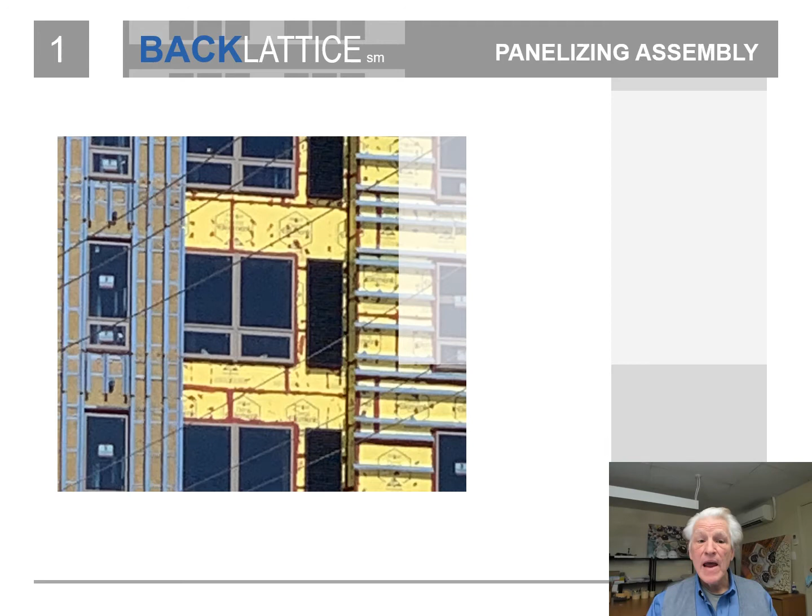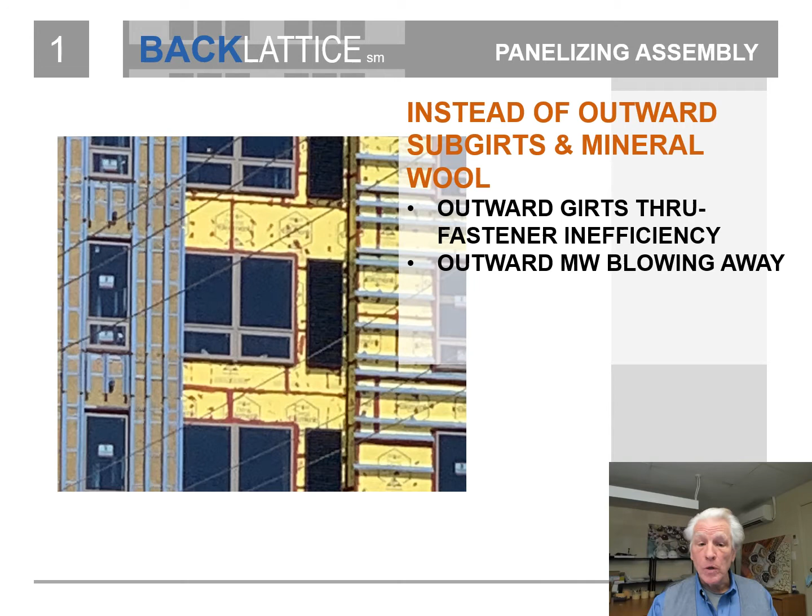Instead of the sub-girt framing being outward of the sheathing, which results in thermal inefficiency at every through fastener. Instead of trying to outwit the weather so that the outward mineral wool does not blow away in a windstorm.

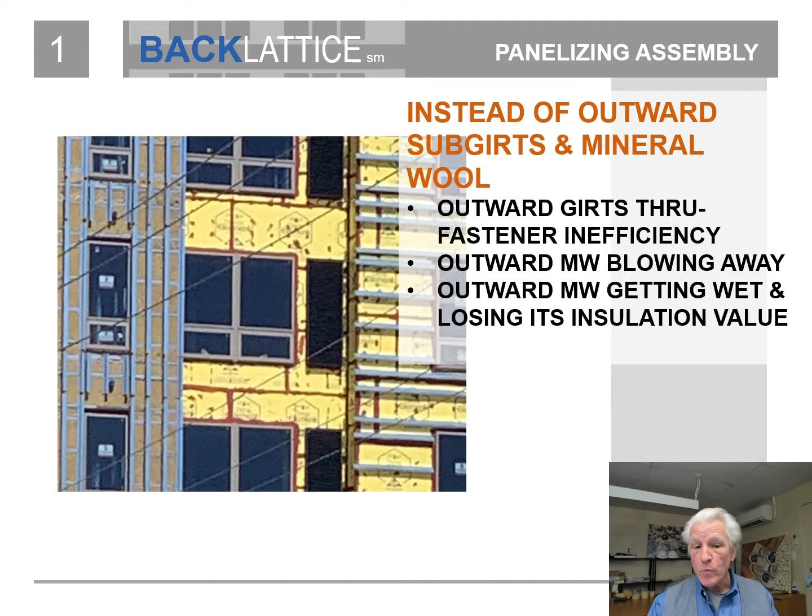Instead of having outward insulation, which produces the conditions for summertime condensation, which then wets the insulation, which then loses its insulation value while wet. Instead of the air barrier delaminating or blowing away before the cladding is installed.

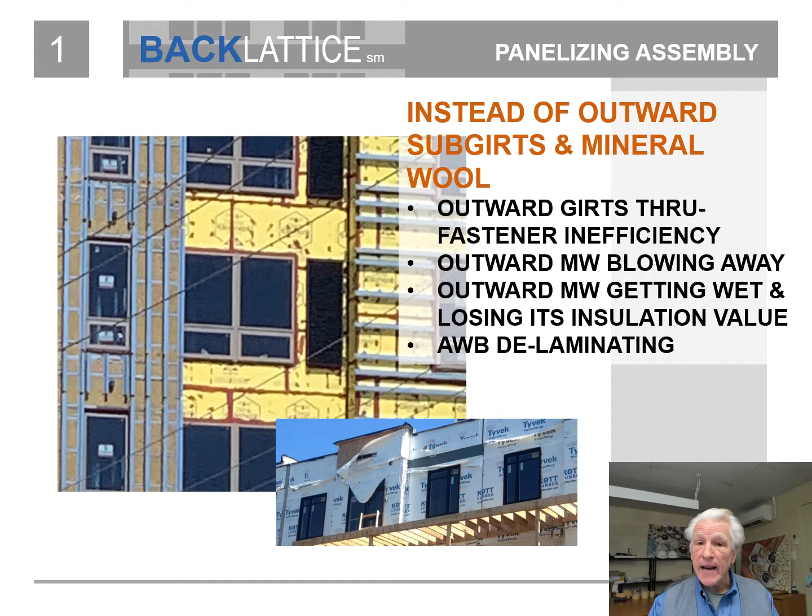Back-lattice is a better wall assembly. With back-lattice, the sub-girts and the cavity and continuous insulations are prefabricated and inward of the sheathing. This results in no through fasteners, only incremental, for high performance energy efficiency. No outward mineral wool or sub-girts.

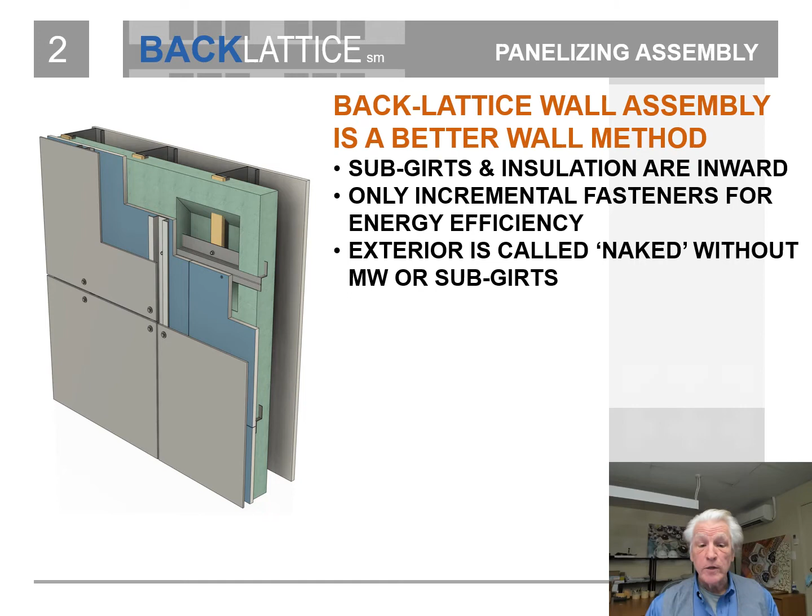With back-lattice, the exterior is referred to as naked. There is nothing outward of the protected sheathing. It is simply a naked wall that is ready for the final panel joint flashing and the finished cladding.

No problem condensation. Back-lattice has thermal modeling and WUFI modeling from Miami up into Canada, proving its multi-season performance. No winter condensation, and yes, summer condensation, but only where it belongs and can be safely managed.

No mechanically fastened sheet membranes, and no short-term delamination. Back-lattice only uses fully bonded, vapor-permeable air and weather barriers with a 12-month exposure. This allows for open-jointed rain screen and plenty of time for the construction schedule and for cooperative weather.

With back-lattice, our goal is faster, cheaper, better.

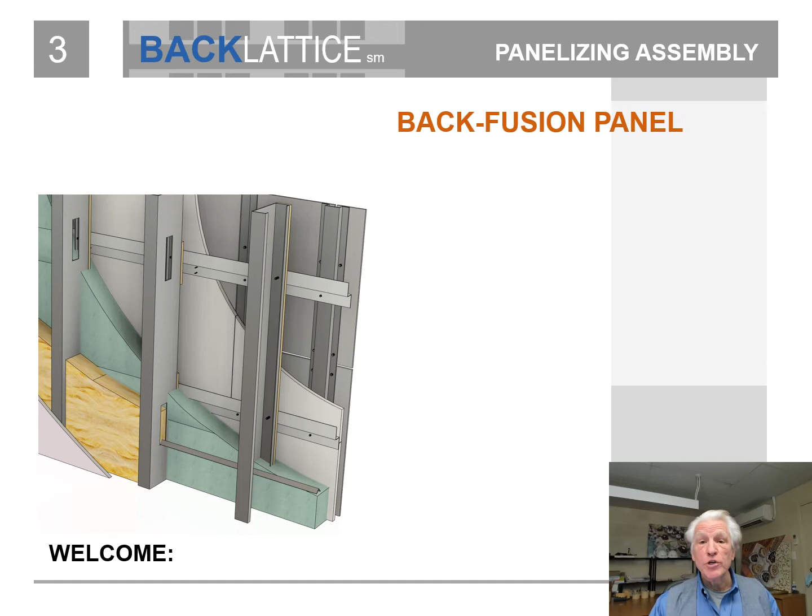Hello, and welcome to a short presentation which focuses on the back-fusion portion of the back-lattice exterior wall assembly. This is David Schoenhardt, the president of Back-Lattice Wall Systems.

My over 40 years as an architect and building enclosure specialist has led me to inventing and developing this back-lattice innovative and high-performance wall assembly.

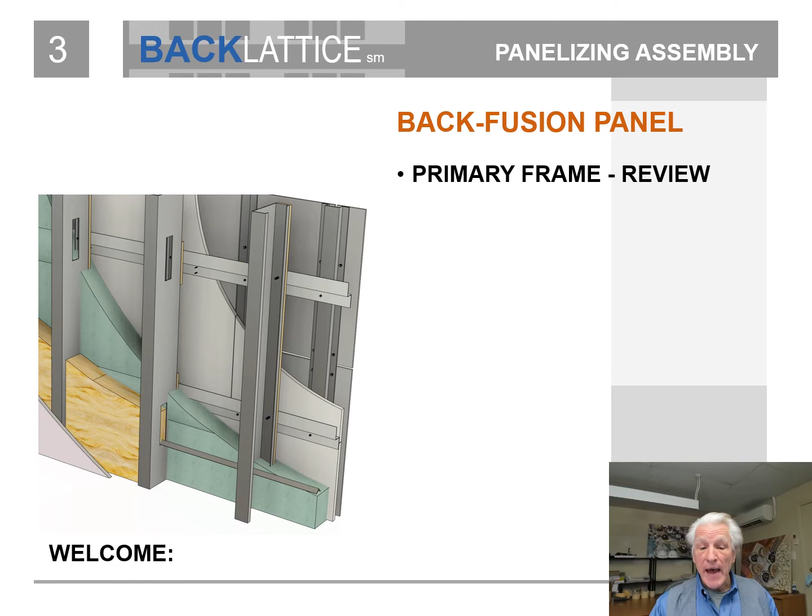In this presentation, we will start by reviewing the panelized stud and sub-girt framing along with the thermal isolation pads that were discussed in detail during our last presentation.

Next, we will describe the exterior glass mat gypsum sheathing for both non-rated and fire-rated assemblies. Then, the air and weather resistant and vapor permeable exterior barrier protection of the sheathing.

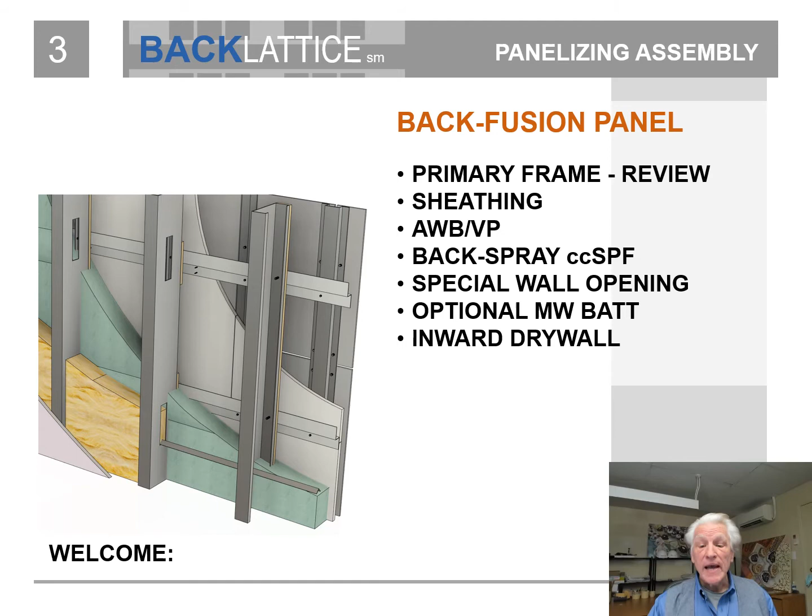Next, the optional between-stud mineral wool batt insulation, which is used to either super insulate the wall or to protect the wall for a 2-hour fire-rated assembly. Then finally, we will discuss the interior gypsum drywall when in a non-rated and in a fire-rated assembly.

As a review of the last presentation, the back-lattice wall assembly method of prefabricating the primary frame consists of the stud frame along with the sub-girt frame.

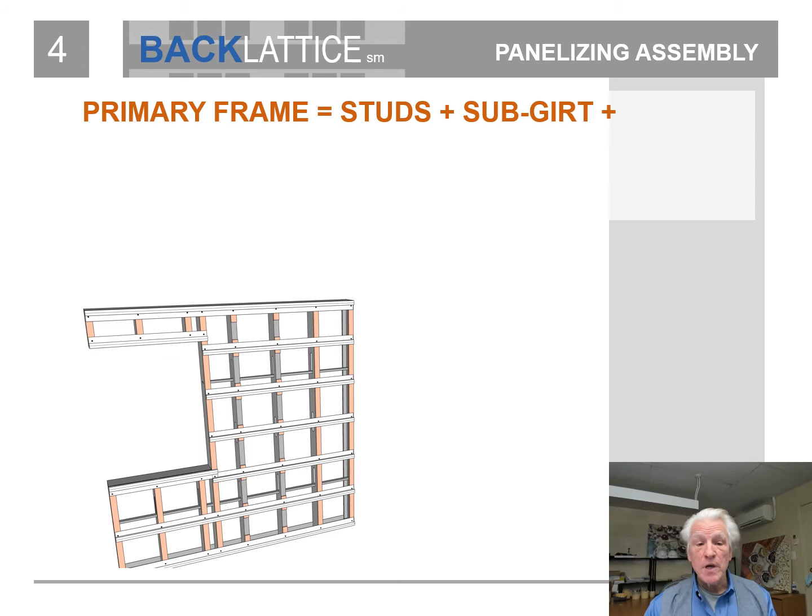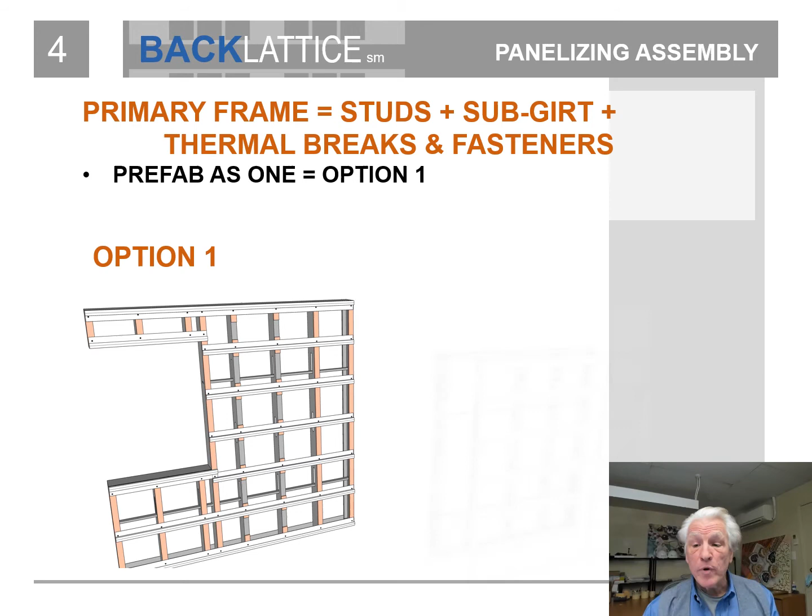These two frames are separated by thermal isolation pads and fastened with a single number 12 at each intersection. The two frames may be fabricated together as one assembly, or they may be fabricated as two pre-framed assemblies that are then joined together.

The primary frame, made up of the stud and sub-girt frames, is located inward of the exterior sheathing.

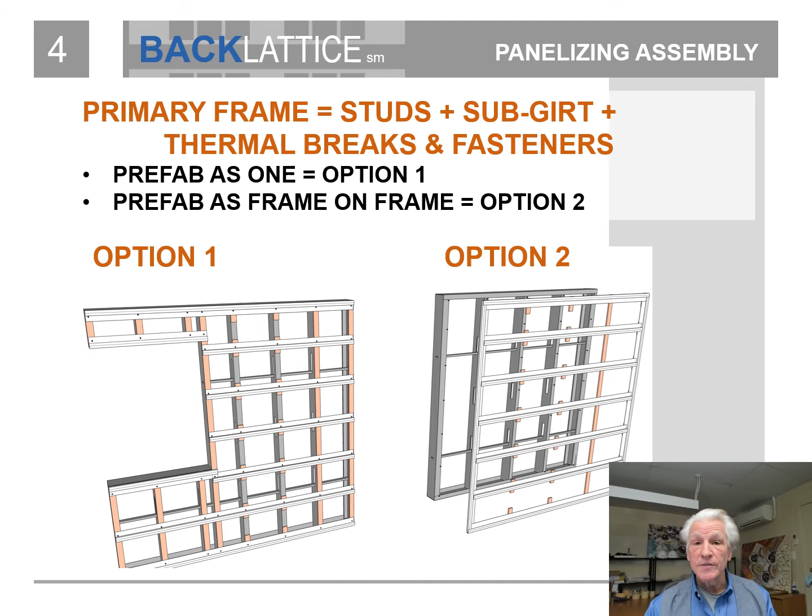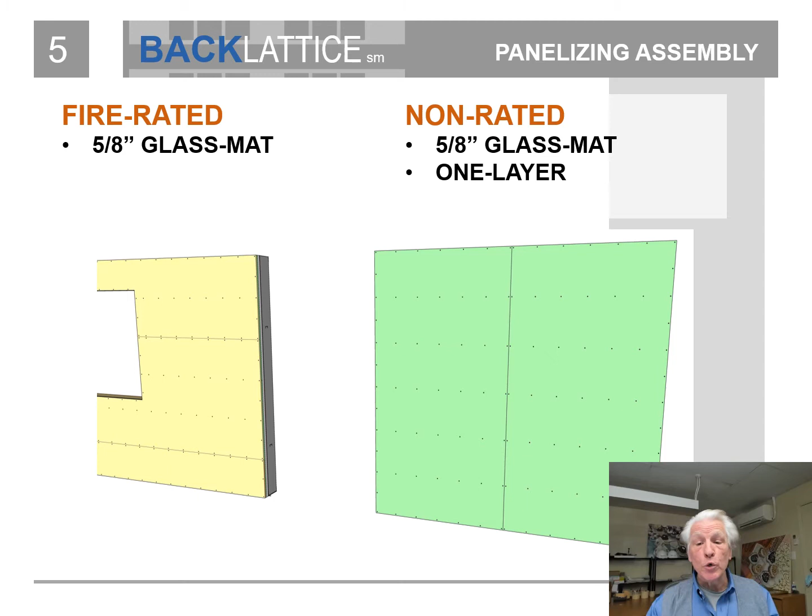The prefabricated back-lattice panel includes the exterior glass mat gypsum sheathing. Typically, one layer of 5/8 inch Type X sheathing is utilized, while if fire rated, 2 layers are required toward the side of the fire exposure.

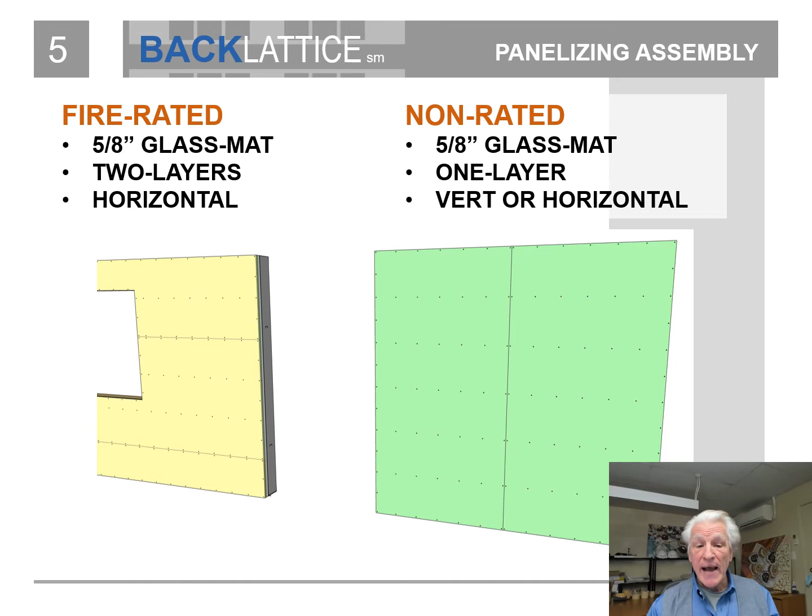The sheathing may be applied vertically or horizontally, but if fire rated, it is then applied only horizontally. This is because back-lattice wants every panel joint to be backed up and supported by the horizontal back-furring.

The back-lattice branded back-furring provides a generous 1 3/4 inch wide leg, which readily accommodates the two sheathing panels, each with a 1/2 inch fastener to edge setback, and it also allows for some construction tolerance.

Back-lattice thinks through and tests the little details.

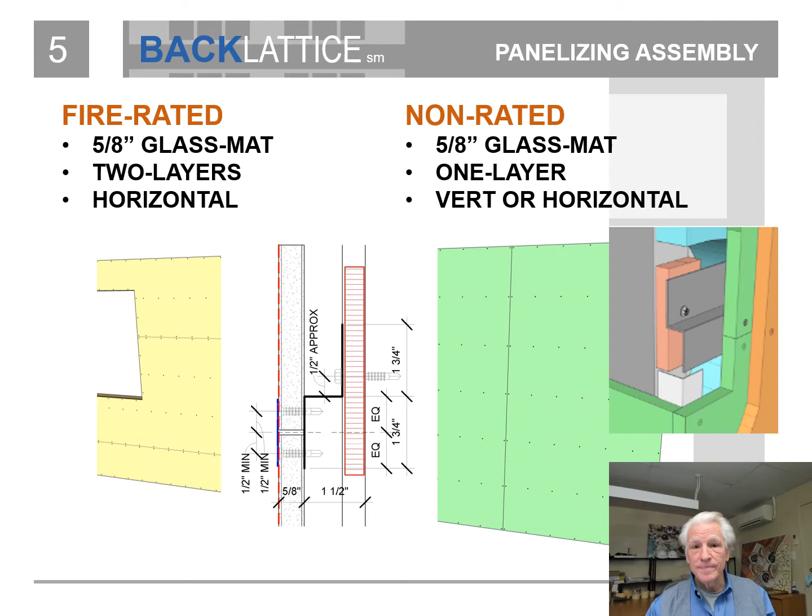The sheathing panels buffet the positive and negative wind loading pressures. Thus, their bracing and fastening is critical to understand.

The back-furring, which braces the sheathing, is spaced by the wind pressure limitations of the sheathing, in addition to the dead load of the cladding system, and the pull-out strength of the single number 12 fastener at each 18 gauge back-furring to 18 gauge stud intersection.

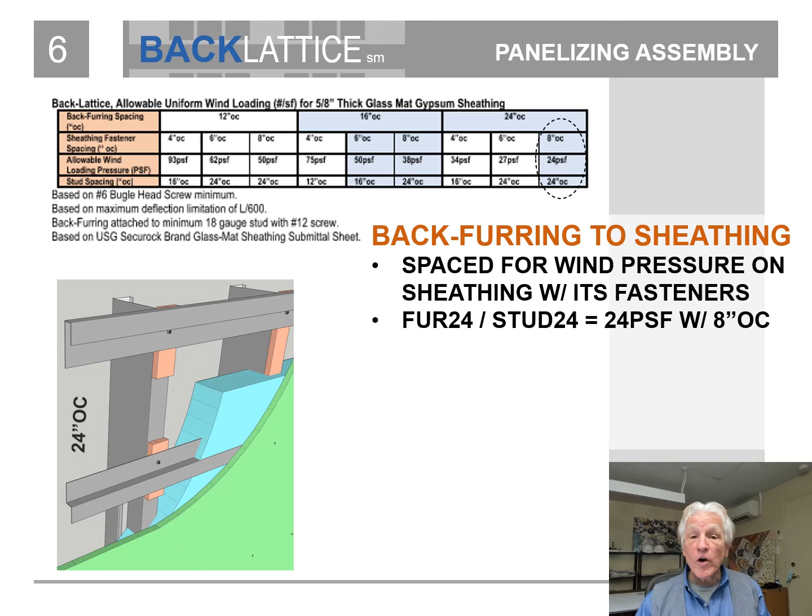With the furring at 16 inches on center and the studs still at 24 inches on center, then the wind loading is 38 psf. At the corners of the building with even greater wind pressure, when the furring is at 16 inches on center, and the studs are also at 16 inches on center...

While the sheathing fasteners are at 6 inches on center, then the allowable wind loading is 50 psf.

While the sheathing chart references number 6 fasteners, back-lattice only utilizes number 8 sheathing fasteners.

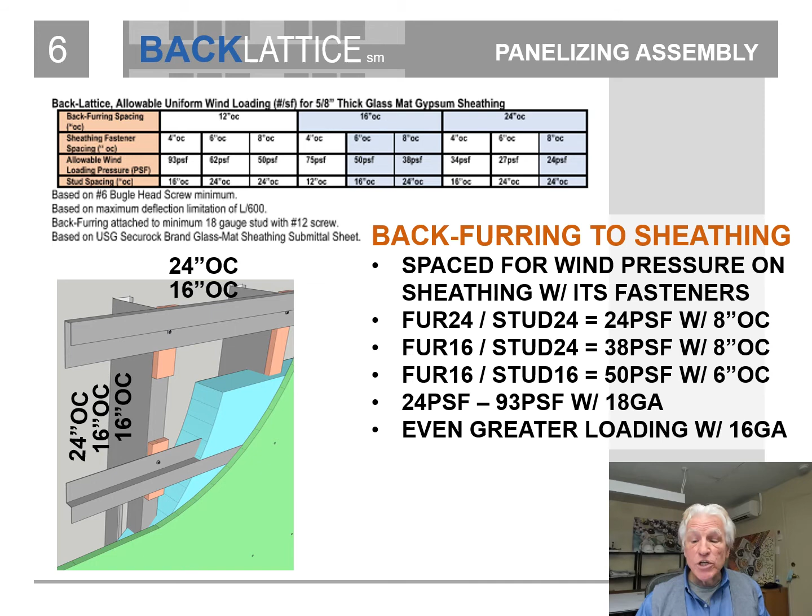Back-lattice has the ability to accommodate a wide range of wind loadings from 24 psf up to 93 psf using 18 gauge back-furring, and even greater loadings if the heavier 16 gauge is used in special conditions.

What is referred to as a naked exterior, back-lattice provides an exterior panel face that consists only of the air and weather barrier protected sheathing. This means that there is no requirement for exterior mineral wool insulation or outward sub-girt framing.

Back-lattice has been NFPA 285 evaluated for this special naked wall condition, which lists a wide range of high-performance air and weather barrier products, as well as the use of lightweight, non-combustible claddings, as well as the spray foam insulation.

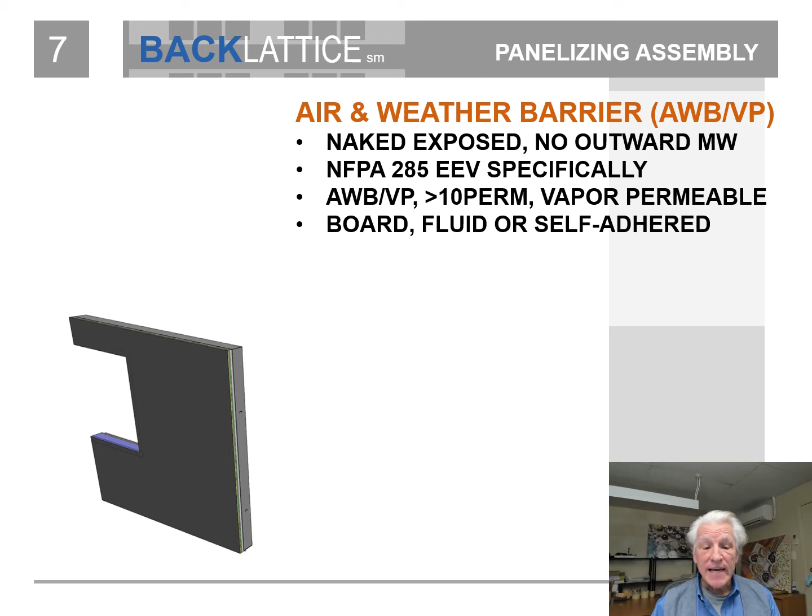Back-lattice utilizes vapor permeable, meaning greater than 10 perm, air and weather barrier membranes of either board applied, fluid applied, or self-adhering membranes. Having the naked outward membrane means that once the back-lattice panel is installed, its exterior is almost finished. What remains is the final flashing of the panel and installation of the exterior rain screen claddings.

Before the cladding proceeds, Back-Lattice encourages quality control testing of the installed completed Back-Lattice wall panel assembly with its naked protected sheathing exterior.

Back-Lattice encourages the use of 12-month rated air and weather barrier in order to accommodate open jointed rain screen cladding, and also to provide more than sufficient time for scheduling the final cladding in better weather.

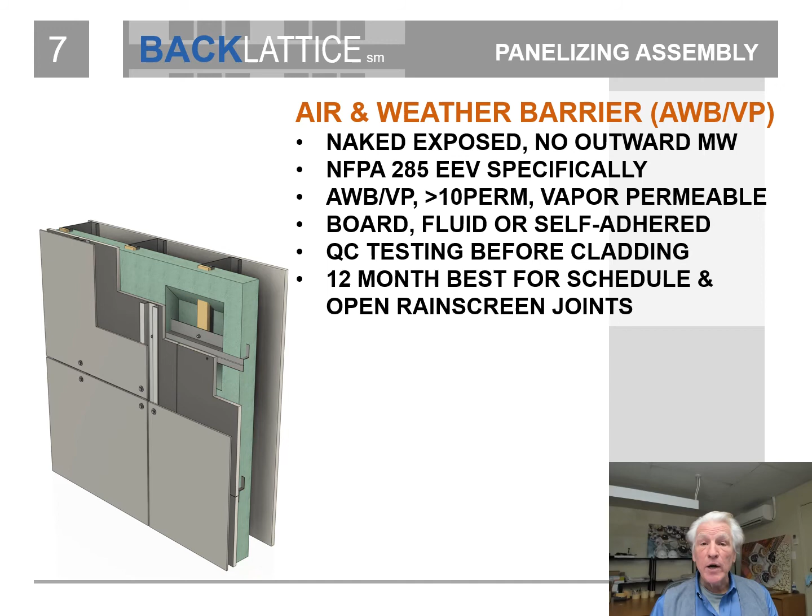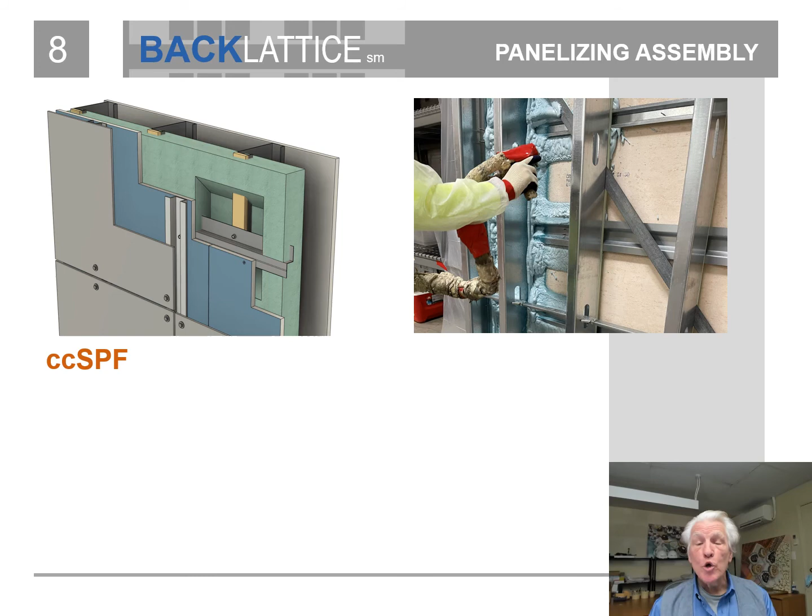Now let's begin addressing the interior, or inward, side of the back-lattice wall assembly. The inward side of the sheathing receives back-sprayed 3 5/8 inch thick, 2-pound density closed cell spray polyurethane foam.

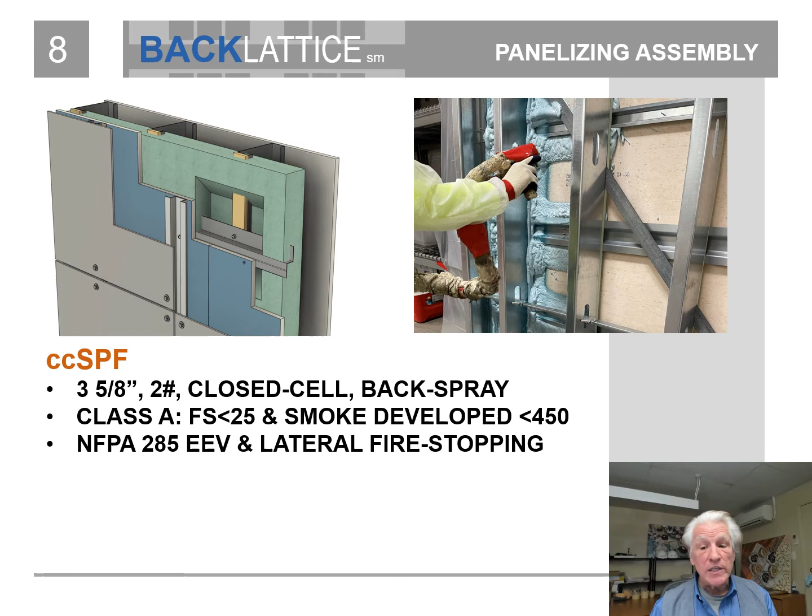Per code, the foam is Class A with a flame spread of less than 25 and smoke developed of less than 450, and it complies with NFPA 285 for vertical and lateral fire propagation and fire blocking within the cavity spaces. The spray foam is closed cell for its insulation efficiency, but that feature is also beneficial because when it is at least 1.5 inches thick, it provides a Class 2 vapor retarder, as required in climate zones 5 and above. Its closed cell structure prevents the formation of condensation because there is no air or moisture vapor occurring within its closed cell mass.

This means that the natural wintertime outward vapor drive does not form harmful condensation. The spray foam also provides a bidirectional vapor retarder, meaning in addition to its interior side vapor protection, its exterior side is also protected from inward vapor drive during hot and humid climates.

The back-sprayed insulation upon the sheathing fully engulfs the ingenious crisscross back framing by encapsulating the back furring and thermal isolation pads, isolating the studs from the sheathing, and capturing the outer stud flanges so that the solid foam mass becomes the complete, total, and continuous insulation.

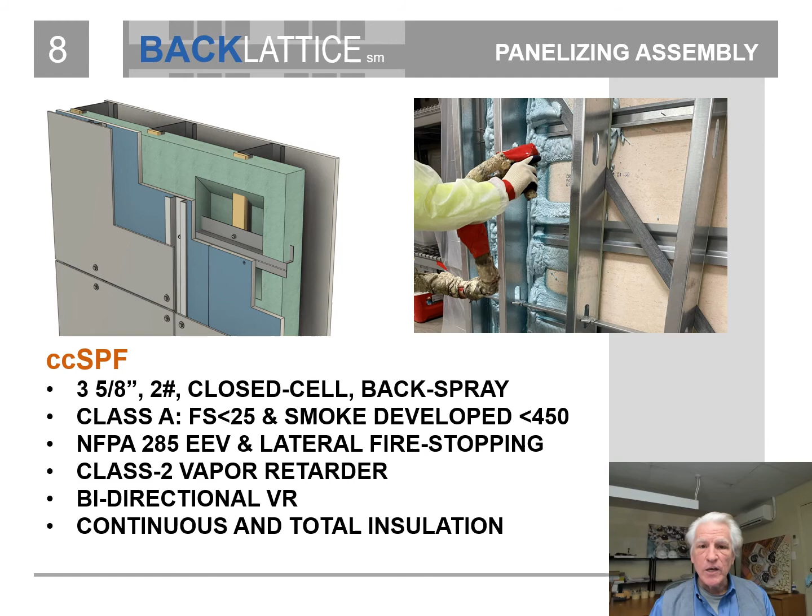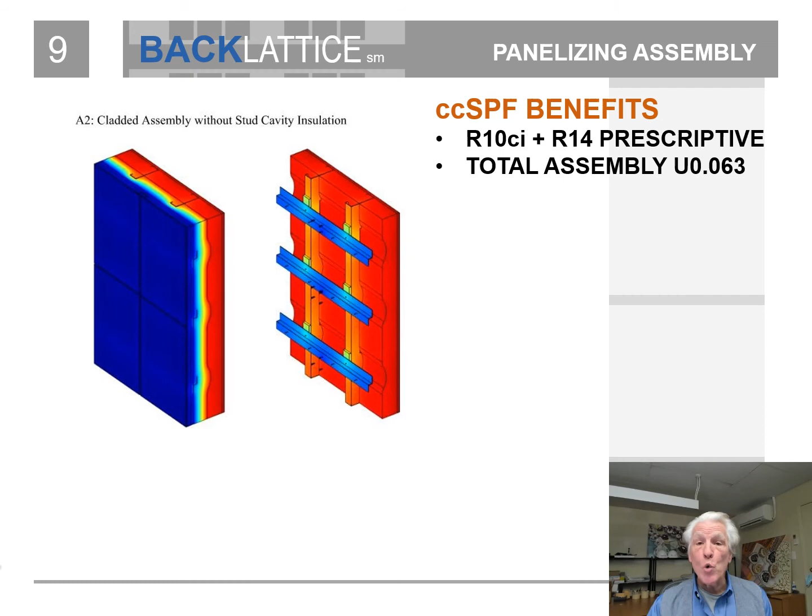The back-lattice entire wall assembly, including its spray foam, has been thermally proven in compliance with ASHRAE using 3-dimensional analysis by finite element method. This has confirmed a prescriptive R value of R10 continuous insulation and R14 between stud insulation, while also having an assembly U factor of 0.063, which is better than code, while utilizing the thermal isolators.

This provides a more than compliant R1.55 thermal break. The spray foam utilizes the latest generation of HFO blowing agents with less than 1 GWP, which is global warming potential, and the BASF Wall-Tight LWF has US GREENGUARD Gold Certificate of Compliance for Chemical Emissions.

The Back-Lattice Innovative Crisscross Thermally Broken Framing, once encapsulated with the many benefits of the closed cell spray foam, creates a synergy greater than the sum of its parts, which is what we refer to as back fusion for the exterior wall.

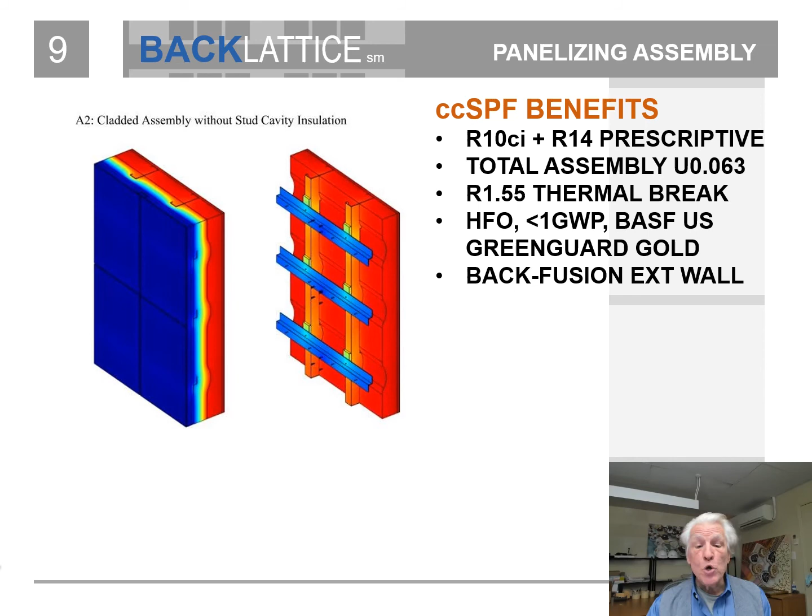If and when a 2-hour fire-rated assembly is required, then the amazing fire-resistant qualities of mineral wool is added into the remaining interior stud cavities.

This R15 of batt can also be utilized to super insulate the back lattice up to R39 prescriptively, or with a total assembly U factor of 0.050.

Back-Lattice has proven with WUFI hygrothermal analysis, from hot and humid climates up to cold and humid climates, that this wall assembly, with or without the mineral wool, does not cause moisture buildup or moisture harboring. What good is energy efficiency if the walls rot from trapped moisture? Back-Lattice, however, is efficient, functional, and progressive.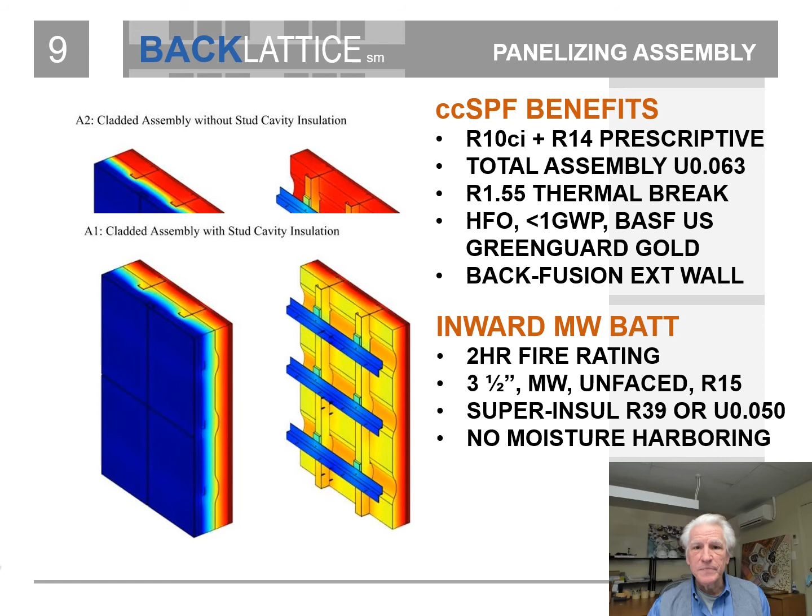While the closed cell spray foam insulation performs exceptionally well as thermal, air, and vapor resistance, it needs to be protected from combustion. As described in NFPA 285 and proven with the E119 fire-rated wall assemblies, the exterior sheathing and the interior drywall provide this spray foam's protection.

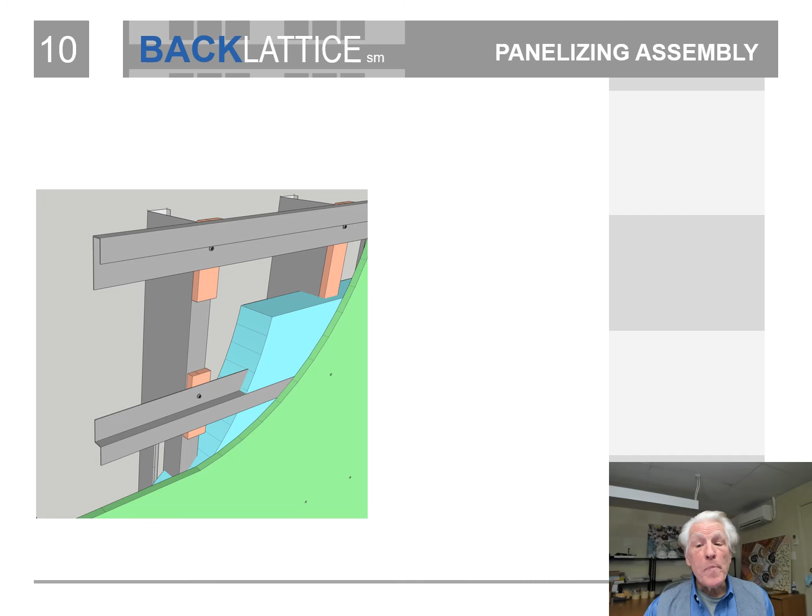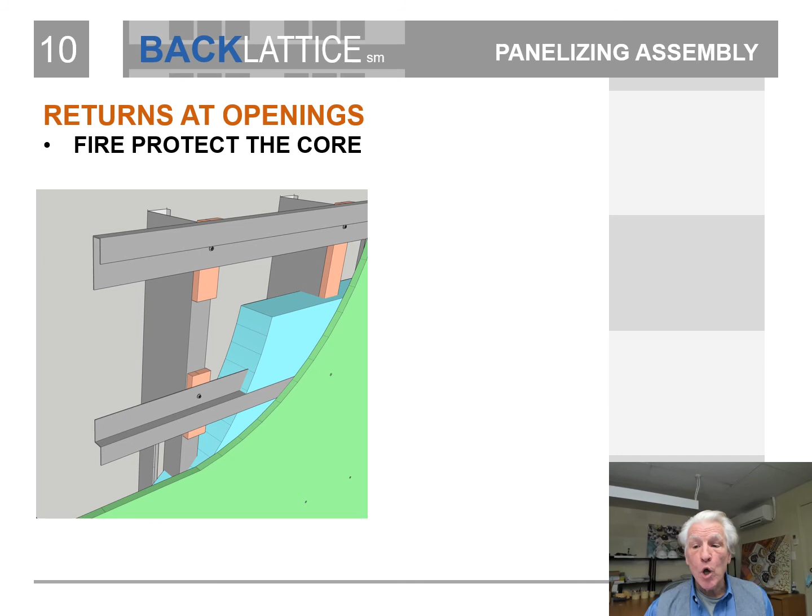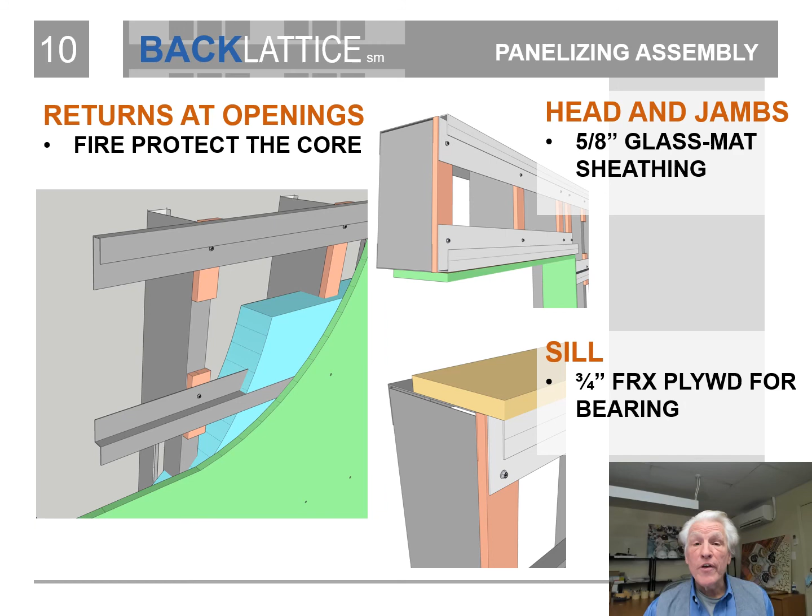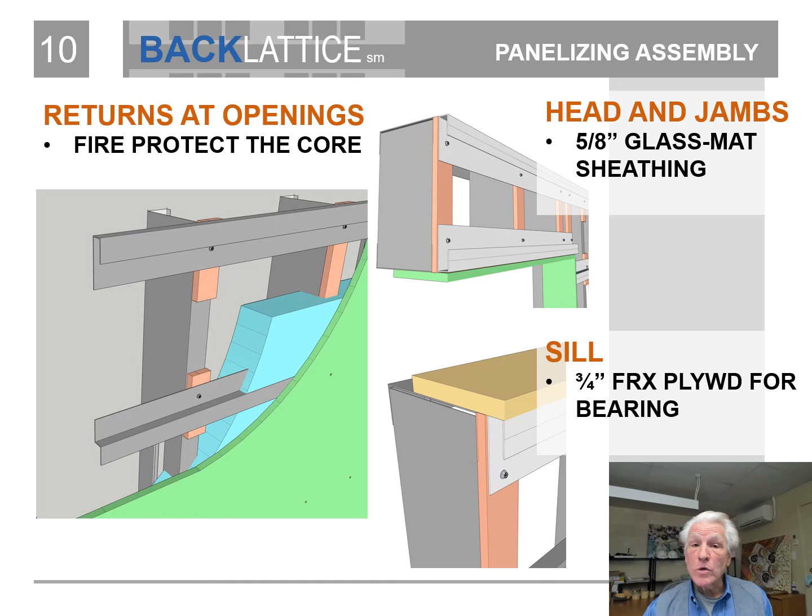When an opening cuts through the wall assembly, a moderate amount of special treatment is required to protect the vulnerable foam core. The jambs and head of the openings are ringed with a single layer of exterior grade sheathing, while the sills are clad with 3/4 inch thick exterior grade fire retardant plywood such as FRX, so that it will protect while also accommodating the load bearing of the window systems.

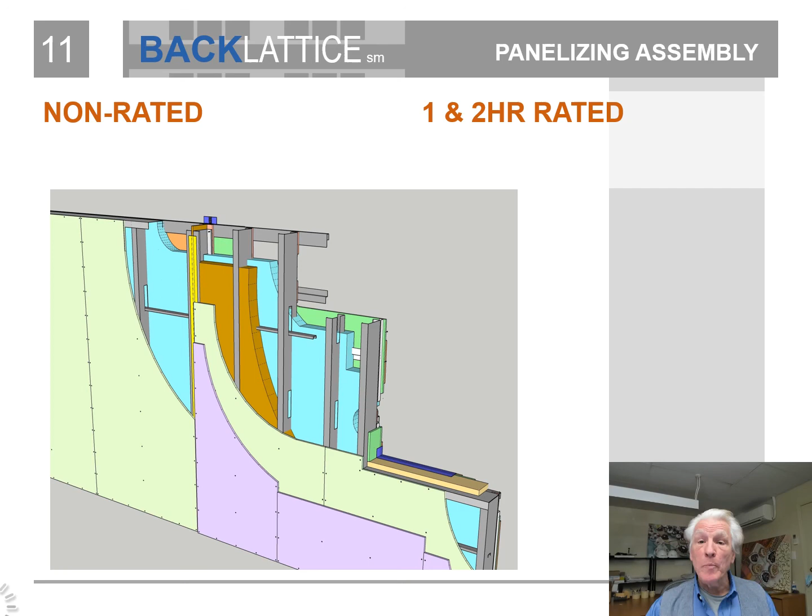While the gypsum sheathing is protecting the exterior of the wall panel, 5/8 inch thick Type X gypsum drywall is protecting the interior of the back-lattice wall assembly. This provides the necessary NFPA 285 compliance, as well as the code-required thermal protection of the plastic foam insulation, as well as contributing to the performance of the fire-rated wall assemblies.

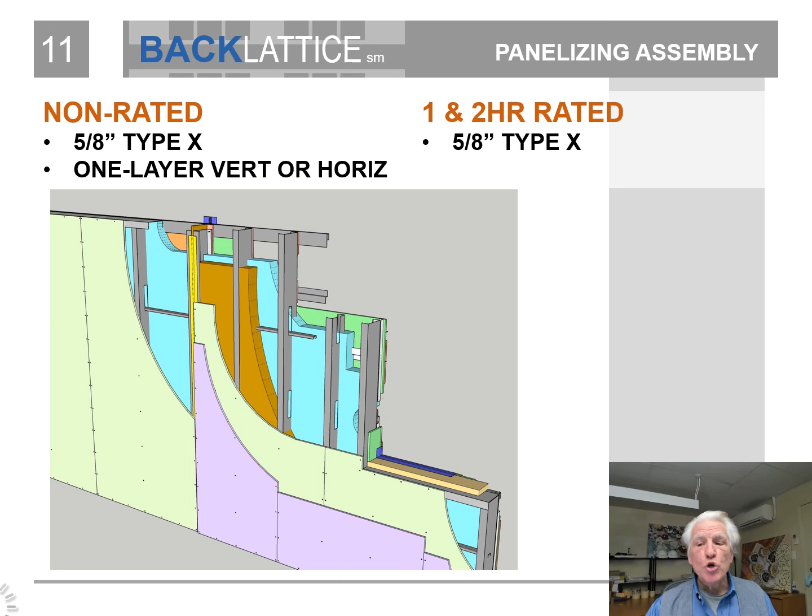Typically, 1 layer of drywall is needed, while at fire-rated assemblies, 2 vertical layers are required.

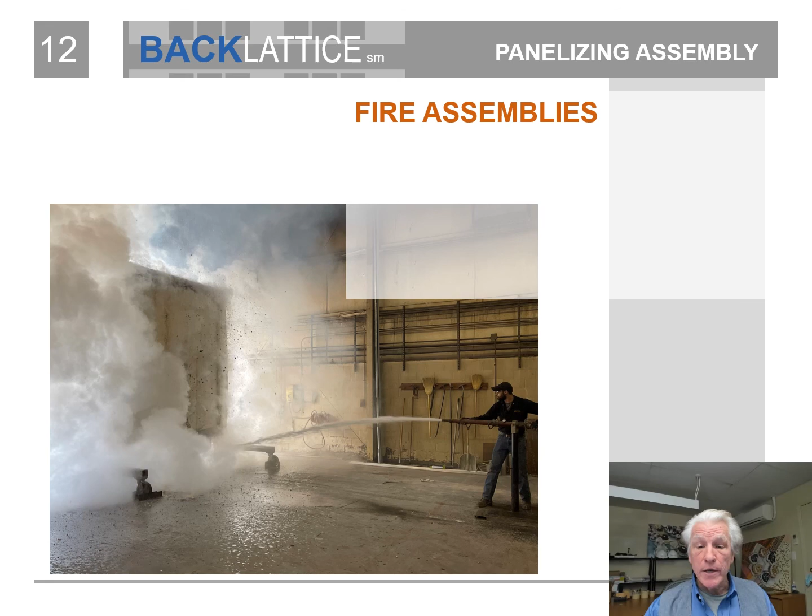Back-Lattice takes its responsibility for safety so seriously that it is annually testing its wall assemblies to confirm, comply, and innovate. Back-Lattice accommodates non-rated load-bearing assemblies by following its NFPA 285 assembly guidelines.

Back-Lattice has also proven an array of fire-rated wall assemblies, such as 1 hour from both the interior and exterior with 100% load bearing, 2 hour from the interior with 80% load bearing, and our latest test of 2 hours from the exterior with 100% load bearing.

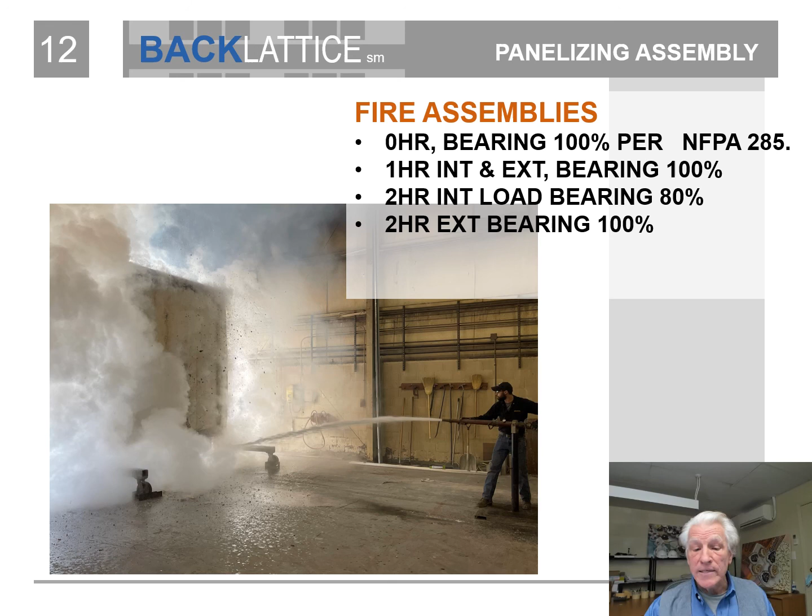While Back-Lattice prides itself on not having outward mineral wool insulation, our 2-hour assembly proudly utilizes outward 1 inch, 8-pound mineral wool solely for its fire protective benefits. Back-Lattice smartly disregards its minimal thermal benefits and does not mind if the mineral wool gets wet with summertime condensation. But wow, it performs spectacularly well in a fire condition.

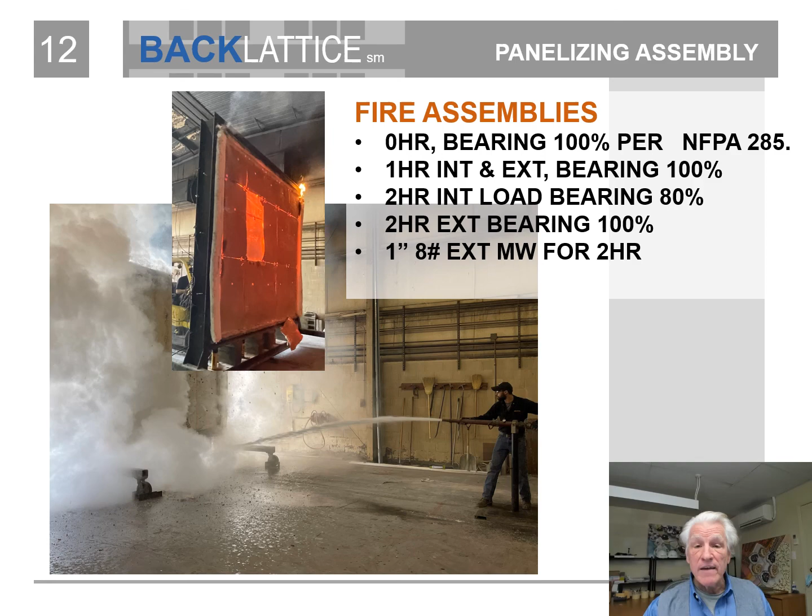This concludes our overview of the Back-Lattice Wall Assembly. Back-Lattice is so innovative in how it places the primary wall performance components inward of the sheathing that we say Back-Lattice is back fusion for the exterior wall.